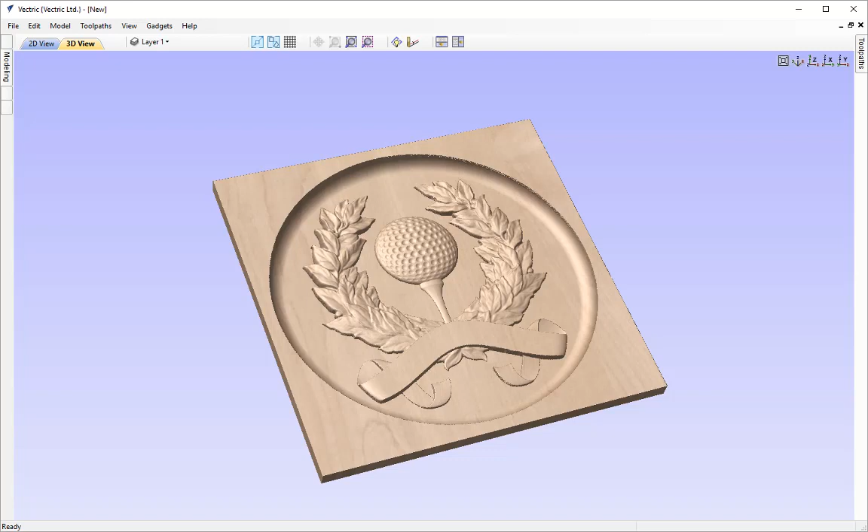I'm just going to go ahead and file close, and then start a brand new file. Let's click create a new file, and it's going to be a single-sided job. We'll start with a width of 8 inches and a height of 8 inches, specify a thickness of half an inch, set the Z0 position to be off the material surface, and have the XY datum position in the center. We'll make sure the modeling resolution is set to high, and then once we've done that, we can simply press OK.

Now when it comes to assembling clip art, we can literally start loading pieces from the clip art tab directly into the software and start arranging them into something that we might like. Or if we have a pre-planned design or even a sketch that we've sketched onto a piece of paper, and that's what I've done, we can import that into the software.

We can do this by coming up to this icon here, which allows us to import a bitmap for tracing. So I'm just going to click this, and you'll find that in your tutorials folder under the Golf Award files folder, then we have the Golf Award sketch. Now this is something I just drew on the nearest piece of paper I could find and scanned into the software. So I'm just going to select that and click open, and that'll place the sketch directly in the center of the software.

Now it came in a little small, so what I may want to do while it is still selected is come to the transform object size and set the selected object size to something a bit larger. So I'm just going to change the width to 6 inches, click apply, then close, and that's going to be the sketch we're going to work with when creating this assembly.

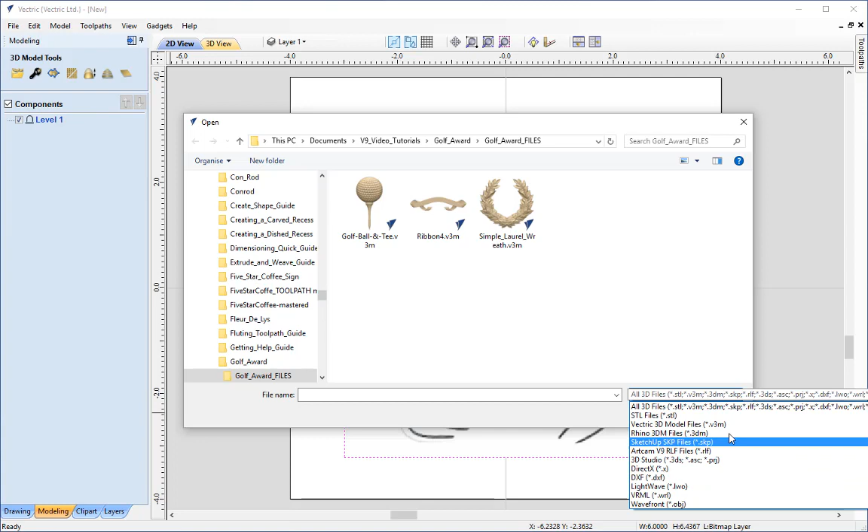Now what we're going to do is first select the simple laurel wreath, and we're going to click that and then click open, and that's going to import that model directly in the center of our work area, like so.

Another way to import clip art into the software is using the clip art tab itself. So if you just click on this tab here, once we've got the clip art installed, you'll see that we now have a folder called clip art, and within that we have all the subfolders which will be listed automatically by the software with all the different groups and categories of different pieces of clip art. Now this is not the only way, we can also add our own folders, so we could go to add and browse the Windows file system to add our own folders of clip art, and that will also bring in the subdirectories if there are any.

And also we can browse our local files. This is just on a temporary basis, so we won't be adding any folders in this section for later use, just simply using it for one time only. So you may want to navigate into our file system and just select one of these pieces of clip art to load into the system.

So I may want to double click that there, and that's going to put the golf tee into the center of our work area, like so.

Or we could simply navigate our library browser. So I may just want to go to the ribbons and banners section, like so, and choose one of these banners that best represents our shape. So I may choose ribbon 4, and we can simply drag that into the work area and let go wherever we want to place that, like so.

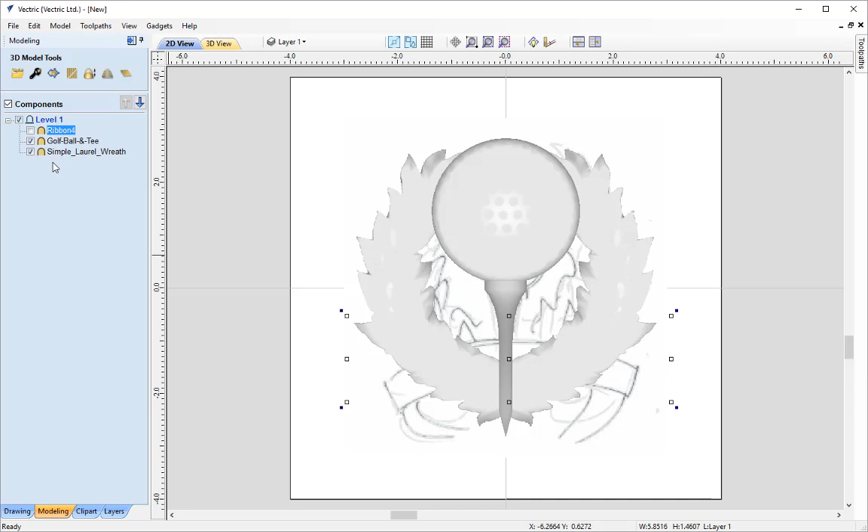So now that we've got all of our clip art into our work area, now might be a good time to start organizing the sizes and positions of our clip art. So what I'm going to do is go to the modeling tab, like so, and switch off the visibility of the ribbon and the golf ball and tee components, so I can edit and alter the position and size of our wreath.

So with the wreath selected, like so, I'm going to go into the drawing tab and resize the object. I'm just going to downsize this a little bit, to 5.5. So I'm going to type 5.5 in there. With the link XY enabled, it's going to automatically scale the height for me, and I'm just going to click apply like so, and close that.

And then I'm just going to go back to the modeling tab, and then I'm going to go ahead and turn the visibility back on of the golf tee like so.

Now it's obvious that this one needs resizing, so I'm just going to make that the selected component, go back into the drawing tab and resize this one again, to let's say 5 inches, apply. I think I need to go a little bit smaller, so I'm just going to type 4 and see what that looks like. Yes, I think that's around about the size that I'm after.

Now I'm just going to put the view into the vertical view so I can see the 3D and the 2D view at the same time. This will help me get a better look at what it looks like in the 3D view as well.

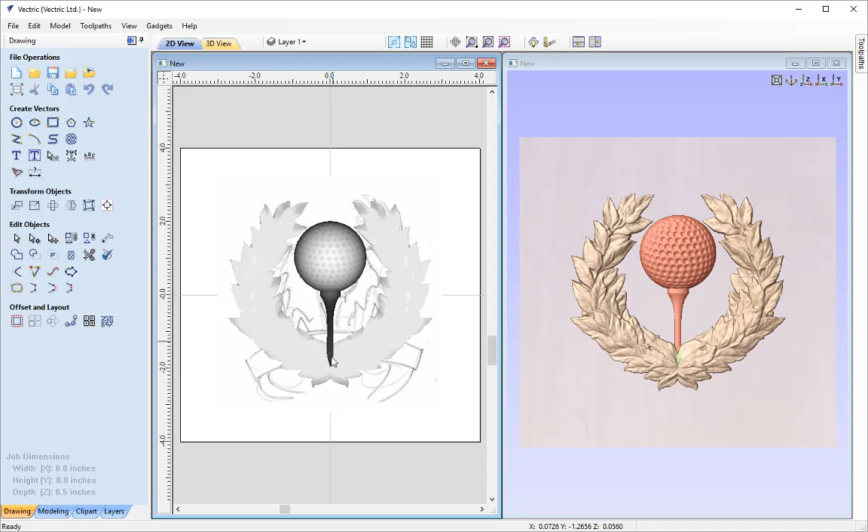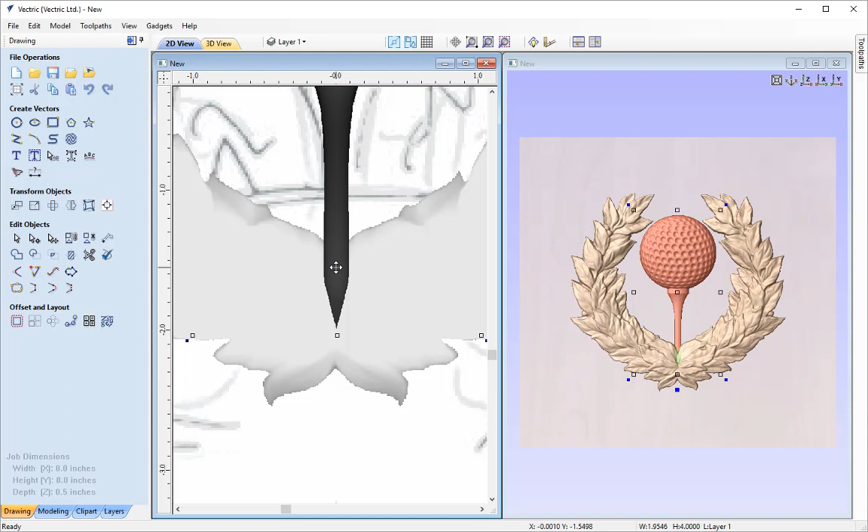So what I'm going to do with the golf ball and tee is I'm actually going to align this to the very bottom of the wreath. Now there is an easy way to do this. Just select the golf ball and tee so it's in transform mode, and you can see that by all the nodes appearing in the 3D view. And then with the mouse cursor with the 4 arrows, I'm going to hold the mouse button down, hold Alt on the keyboard, and that will allow me to drag this down vertically. And what I want to do is just get the point so it matches the very point of that bottom of the wreath there, like so.

And then when I'm done with that, I can just press F on the keyboard to zoom to fit, like so. And then what I'm going to do is go ahead in the modeling tab and turn back on the ribbon, like so.

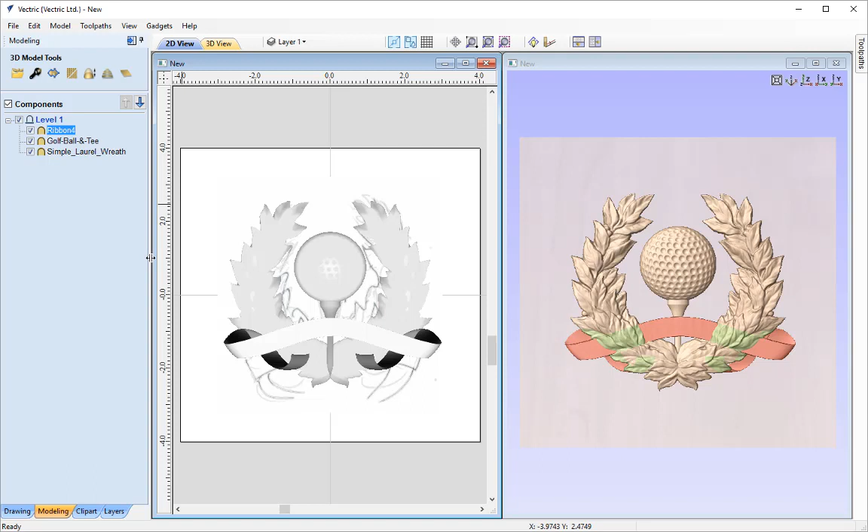And with that, I'm just going to again select it like so. Now, because of the way that we imported the ribbon into the software, it's not actually in the dead center of the software. So I'm going to need to center that after I've resized this.

So I'm just going to resize this the simple way by using the transform shortcut. So I just want to change the width of this to 5. So I'm just going to simply type in 5, 0 to auto scale the height and press enter, and that's going to change that for me.

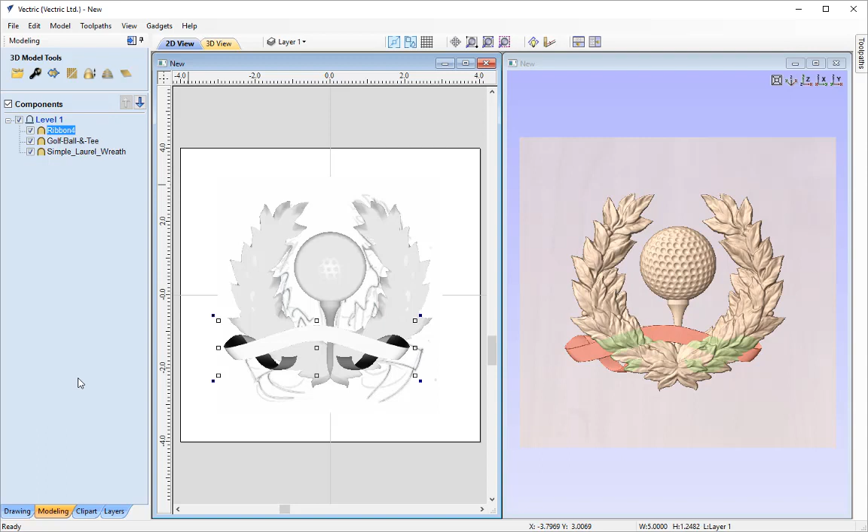And then what I'm going to do is center that in the center of our material like so. And then I'm just going to close that, put it back into transform mode, and from the center I'm just going to hold Alt again, just drag that down in line vertically to around about here, like so.

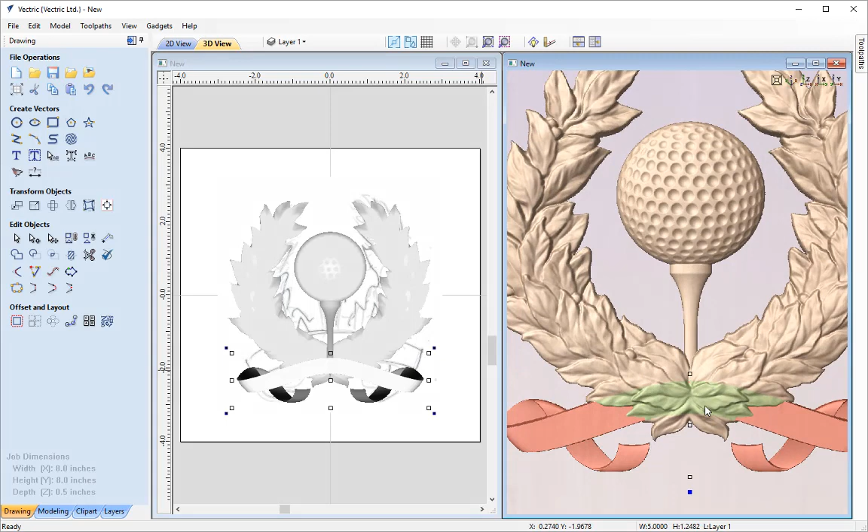If we zoom in a little on the 3D view, you'll see there's a very small gap between the ribbon and the wreath. That may cause problems when machining, and we may not be able to clear that gap depending on the size of the tool we're going to use.

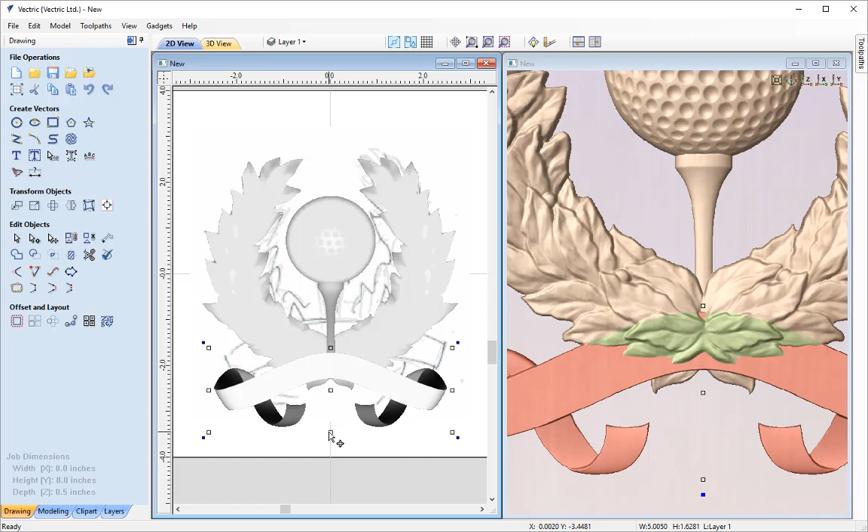So what I'm going to do is resize the ribbon itself. I'll grab this center bottom node and drag it downwards, roughly to around here. Let me zoom in a little bit and drag a bit more, like so, then hold Alt on the keyboard and try to center that in the middle of our wreath.

So what I'm going to do here is press this icon to get the full view back in the 3D view, like so, and that looks about right. That's perfect.

That completes the positioning of our 3D components, but now we need to think about the order of appearance of our 3D components, as at the moment they are intersecting one another. For this we can use solely the 3D view.

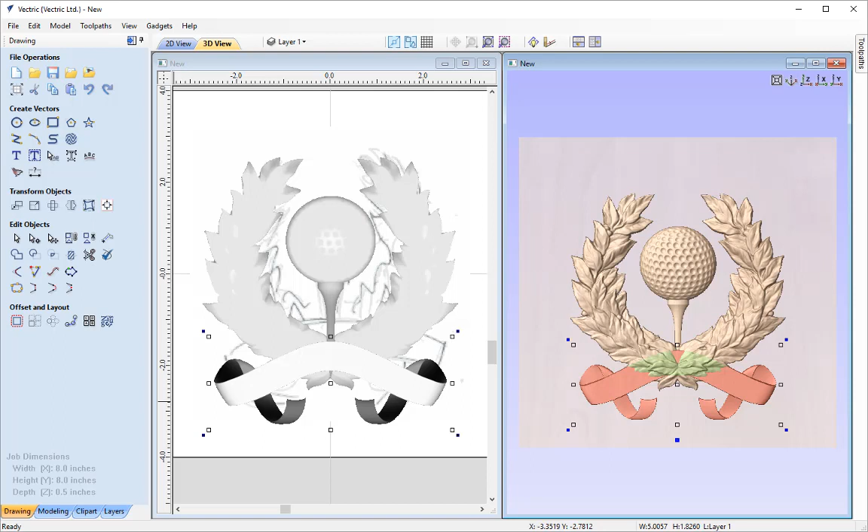I'm just going to enlarge the 3D view and take a closer look at the components themselves. Now the order I wish the components to appear is: I want the golf ball and tee to appear at the back of the composite model, then I want the wreath to be in the middle ground, and then I want the ribbon to appear in the foreground.

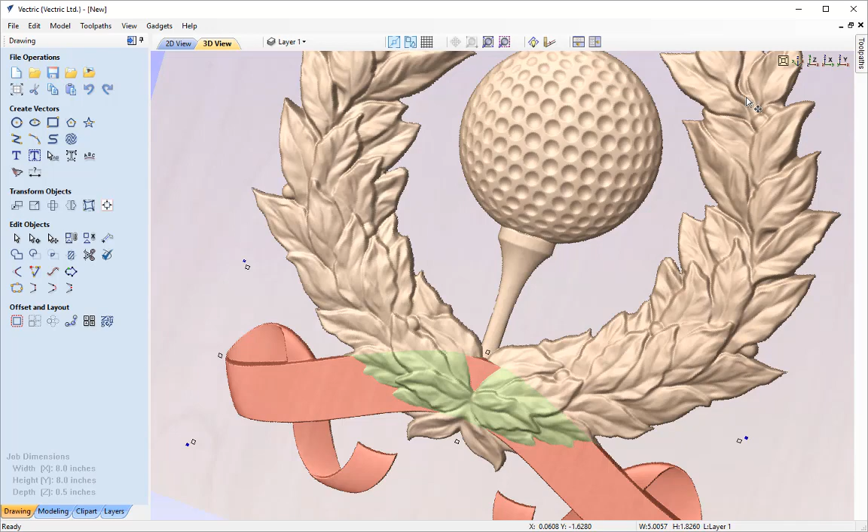Now I just did move that, so I'll press Ctrl Z to undo that movement, just in case you happen to do anything like that as well. So I'm just going to click that back in the Z axis.

Now I'm going to start with the wreath, so I'll double click on the wreath like so, and work solely in the 3D view here. I'll click again to get the transform nodes available, and you'll see this bottom dark node here.

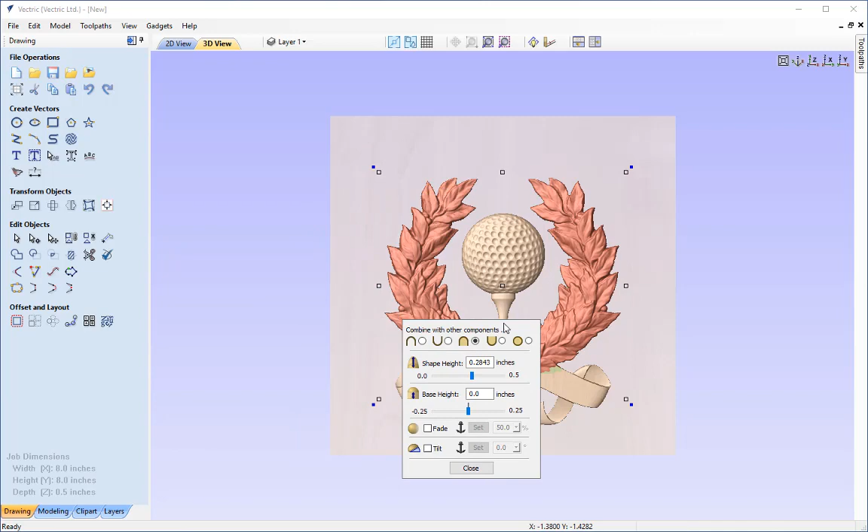If we click that, we get a short version of the component properties form, and we can actually move this anywhere we like within the window. We don't actually need to keep it inside the software either, so if we wanted to take it outside, we can.

Now we can see at the moment that the wreath is at a height of 0.28 of an inch. So I don't really want to add any more height to the wreath, and I don't really want to reduce the height of the wreath, as you can see we've got some really good detail here on the wreath.

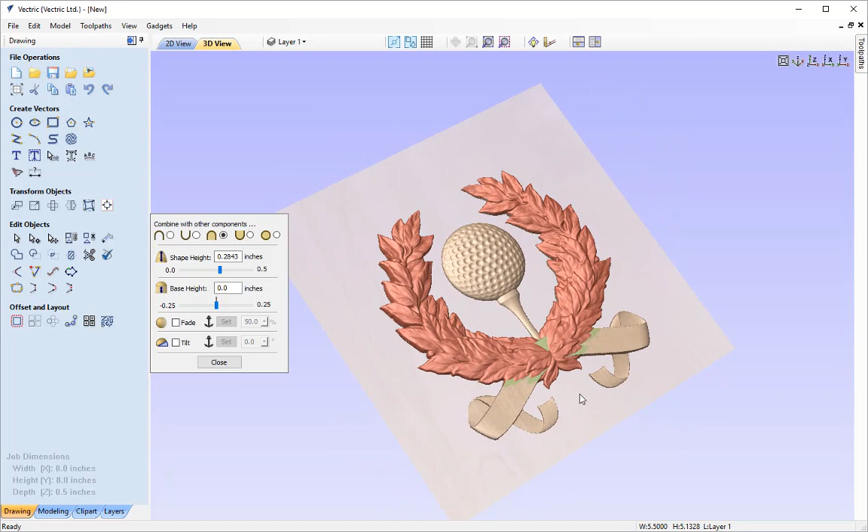But what we do need to consider is the fact that this ribbon does need to stand proud on top of the wreath, and I don't really want to add too much height to the ribbon either.

So the way we can actually conquer this problem is by applying a fade to the component. What this does is we set an anchor point from one position, which acts like a hinge, and then we put another anchor point in another position, and in between those two points we specify, we gradually fade down the height of that component to a percentage we're going to specify.

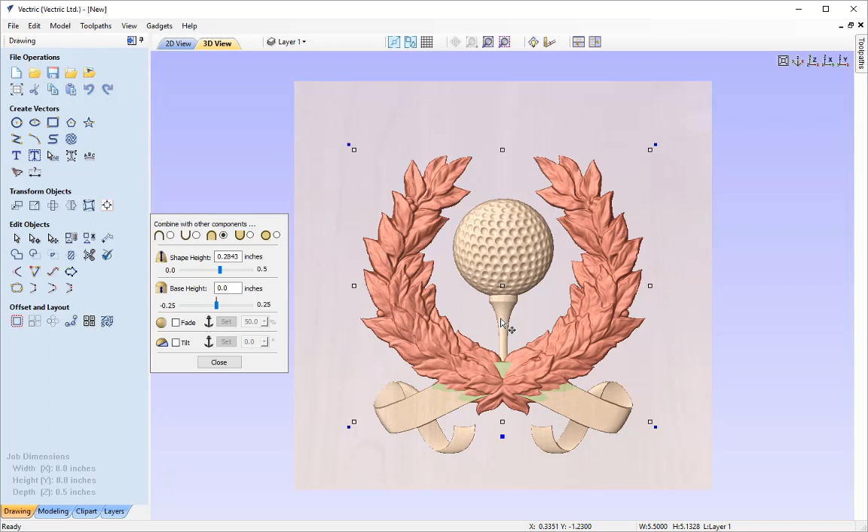So let's check the option to fade, and then check the button to set the anchor points, like so. We're going to fade from the top, so this is where it's going to hinge from, and we're going to click down at the bottom where we specify where it's going to fade down at its most.

As you can see here, it's faded down quite a lot, so we've already achieved what we want, but we can actually try and get away with fading it down less. So let's just scroll down, and this will automatically readjust the 3D view for us.

So I don't want to lose too much detail, so I just want to go down to maybe, let's try 40%, like so. So maybe something around this area here, like so.

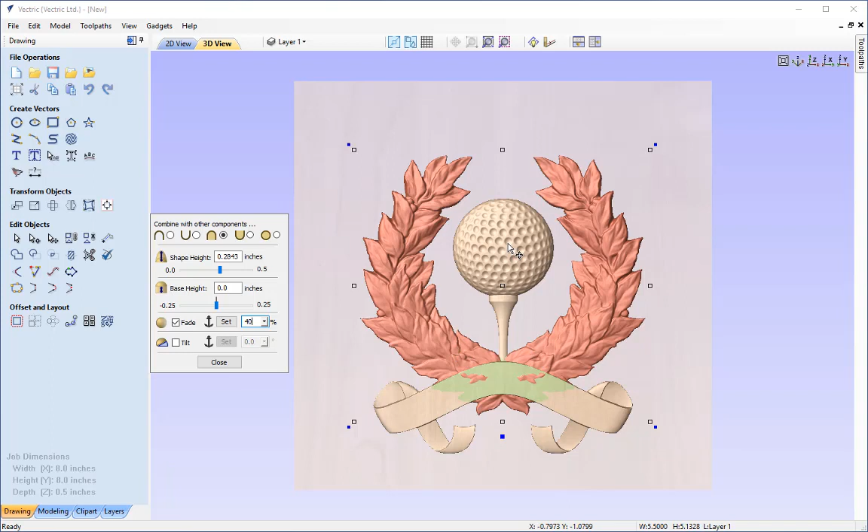And then what we can do is we can then double click the golf ball and tee and then adjust the position of that. So if we just select that, like so, and just zoom in a little here. Now you can see at the moment this is standing sort of in the same region as the wreath. So what we want to do is we also want to reduce the height down the bottom here to make it appear in the background.

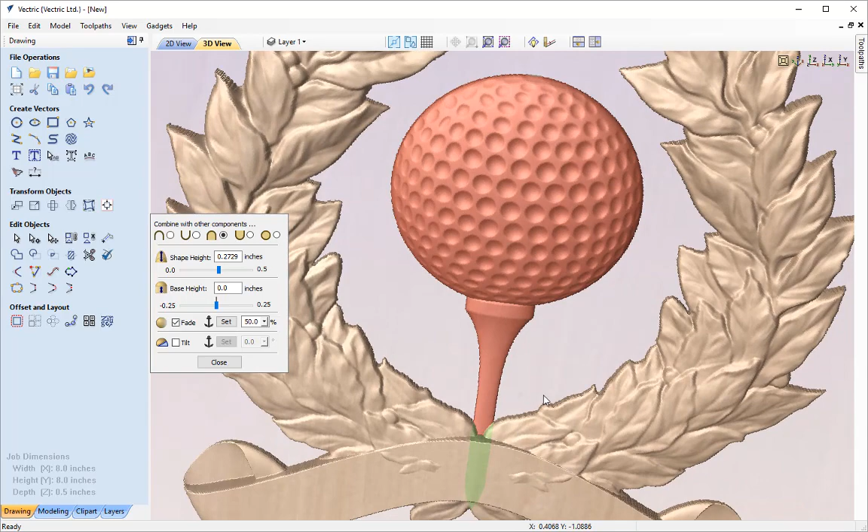So we can apply the same method again that we just did to the wreath. So if I just click that back in the Z-axis there, just zoom in a tiny bit, I'm again going to use the fade option. So I'm just going to click the set button again. So I'm just going to do the same from the top through the bottom, like so, and you'll see that straight away that has now put that behind the wreath for us. So that's automatically achieved exactly what we're after.

And now we can move on to our last component, which is the ribbon. So I'm just going to double click that one there, like so. Now I could, if I wanted to, adjust the shape height to just push that above the wreath that's coming through here, or I can simply add a base height to the component itself.

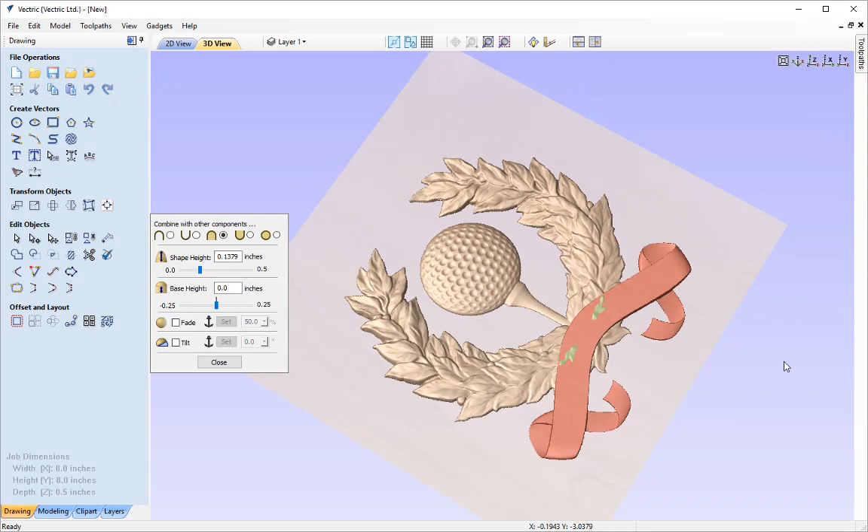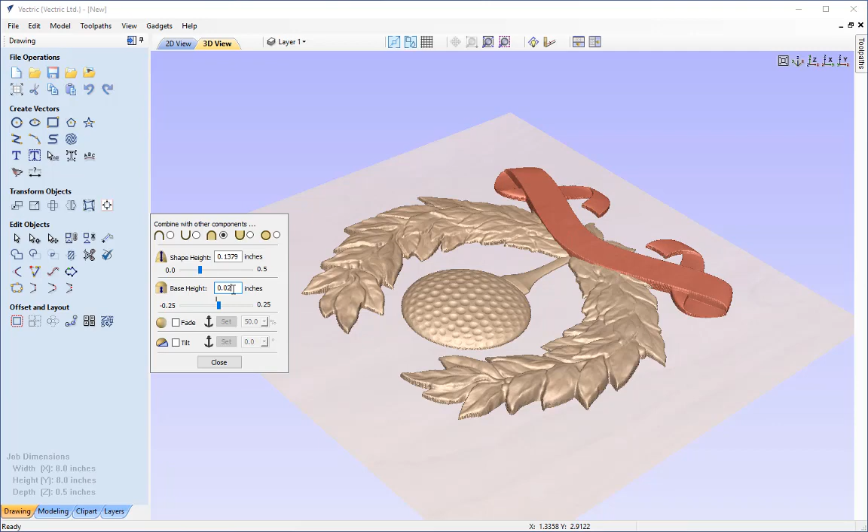So if I just go ahead and specify a value here, so I'm just going to go for 0.01, just press spacebar, and you'll see that has pushed it up a little bit, but I can just see 2 speckles of the wreath still coming through there. So I may just want to clear that just a little bit more, so I might just go for 0.02, like so. And let's push that up enough now where we can't see any of the wreath coming through either.

So that now gives us the visual appearance that the wreath is sitting behind the ribbon and the golf ball tee sitting behind the wreath.

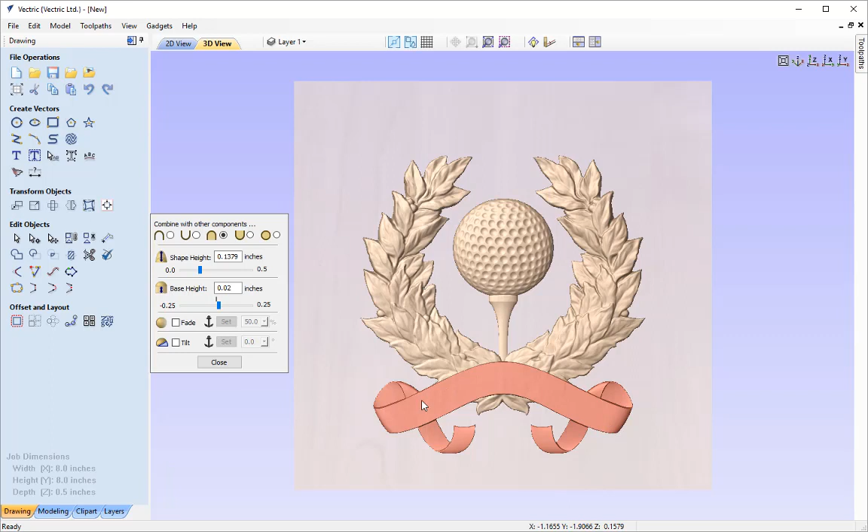So the next thing that I'm going to think about is actually applying some text ready to machine later on along the ribbon. So what I'm going to do is I'm just going to close the components form there, like so. And then what I'm going to do is I'm going to go to the Draw Text tool. And as I'm going to be working with text, I'm going to go back into the 2D view. So I'm just going to go into here, I'm going to click F on the keyboard to zoom to fit.

And what I'm going to do is I'm just going to type out some text. So in capitals, I'm just going to type hole in one, like so. And I'm going to use a true type font, and you can use any from your system default fonts, but I'm going to use one called Georgia, like so. And you can just type that freely in and that will come up with the nearest font that you've got in your system. So I'm just going to select that, like so.

And I'm going to give this a text height of 0.4 of an inch, and I'm just going to click apply and close, like so. Now my aim here is actually to have this text follow this curve of the banner.

So what we're going to do for this is we're actually going to go ahead and create ourselves that curve manually. So I'm just going to deselect the text there, and I'm going to go into the Draw Polyline tool, and what I'm going to do is I'm just going to zoom in a little towards the bottom of the ribbon. And what I'm going to do is I'm going to click just at the point here, and I'm going to hit the center of that ribbon here, and you can see that I've got the suggested center of the material there with the vertical line that's heading up.

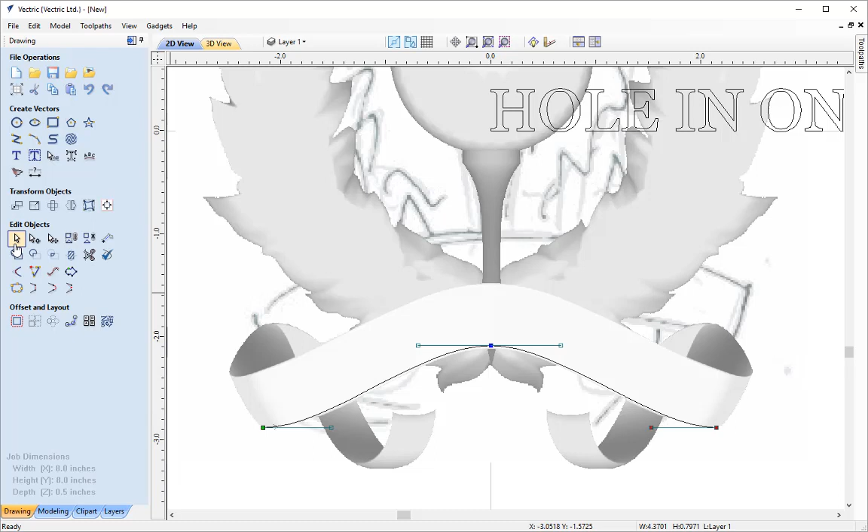Feel free to make further edits if needed. I may want to move that node out a bit so it matches the point on the corner, dragging it horizontally using that vertical line as a guide. That's gone a little too much, so I'll bring it back like so. Once done, we can use the normal selection arrow.

We can zoom to fit, and what we're going to do is first select the text, then hold shift down and select the vector we just created, and then go to this option under the create vectors section called text on a curve, where we can wrap text along a curve.

Click that, and we'll be presented with various options for applying text along a curve. First, I want to maintain the text size as it is, and I don't want to mess with the text spacing. For text position, I want it above the curve, aligned in the center of the line, which is good. I'll add a slight offset distance of 0.1, a tenth of an inch, and align it to the curve.

I'll click apply like so. Now if you get anything like this happening, it's because this option, text on the other side, has been checked. So just uncheck that, and you'll see it's now put in place correctly. Simply click apply and close.

Now I'm just going to click in the white space to deselect both of those, then select the curve we created and hit delete on the keyboard, as we no longer need that vector.

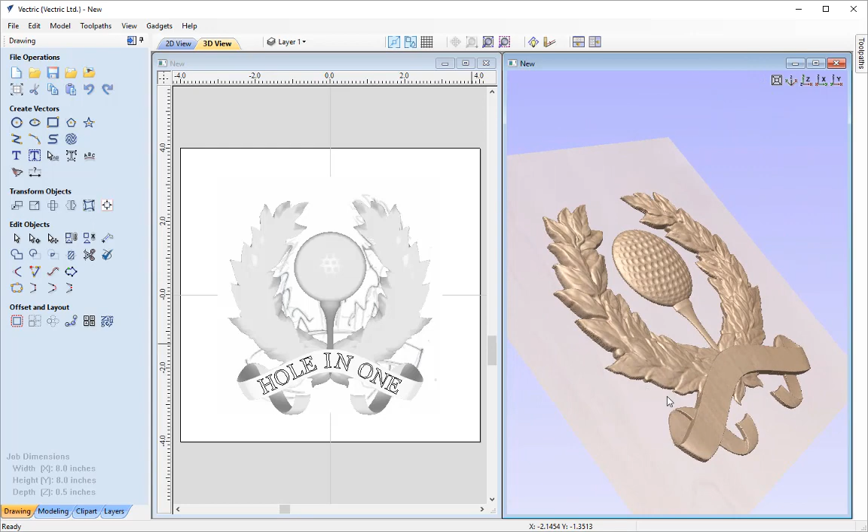If we come across anything like this and want to make a quick edit to soften the edges of a component, we can simply double click to select the component we want to smooth, come to the modeling tab, and go to this option, which is to apply a smoothing filter to the component.

We just select that, and you'll see it automatically applies 50% smoothing. You'll notice that's already made the corners a lot smoother than they were. Just to compare what they were, in case you missed that, let's bring it all the way down to minimum, and you'll see the difference between those two now.

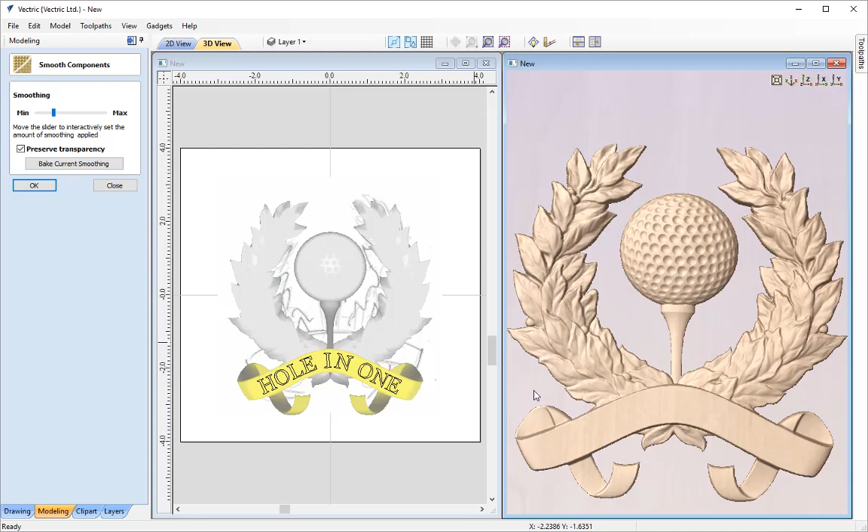Now what I'm looking for is around about 25%, 20% smoothing. So if I just click here, you see that that's added just enough smoothing now where I feel that complements the wreath and the golf ball. It actually feels like it belongs within that composite model. So once we're happy with the smoothing we've applied, all we do is simply click OK, and that will exit that smoothing form for us.

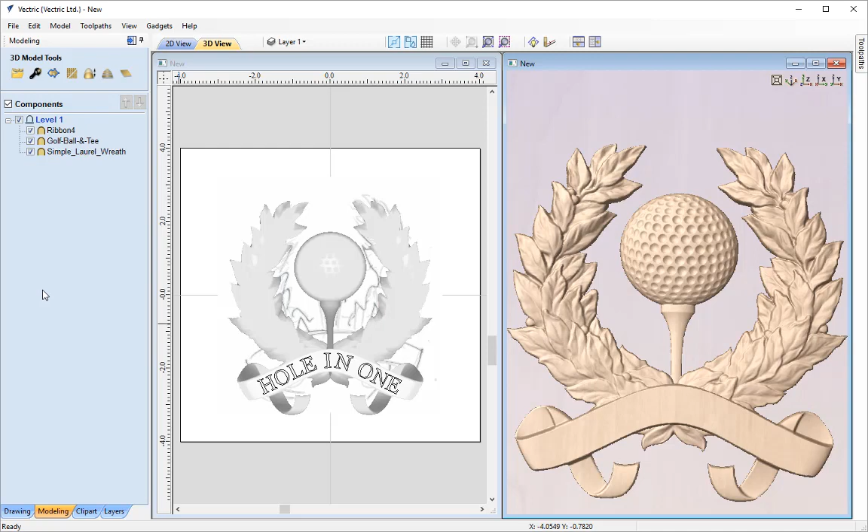Now though, we can start to think about placing our award into a dish. When working with parts that are dished or recessed below the modelling plane, it's very important that we have a component that represents the plane, for two reasons. One, it helps us to see visually the part, and two, it helps prevent some possible issues we might encounter when it comes to machining, which we will look at when we set up the toolpaths.

So to add in a modelling plane, all we do is click this icon here, and you'll notice that has created us a component named Zero Plane. Also, if we check the Layers tab, you'll notice it has also created its own layer called Zero Plane, with visibility checked off. The reason is that if we check the visibility on, you'll notice it's gone grey, matching the outside of our working area. If this component was placed on any other layer, it would obscure all of the components in the 2D view. That's why we automatically put it on its own layer at the very top of the layer list, and check off the visibility.

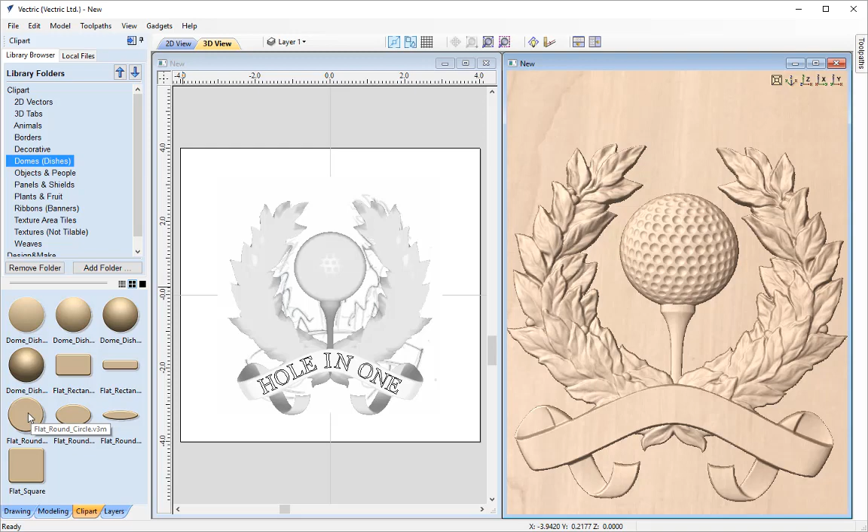Now we've done that, we can go ahead and add our dish. I'm going to go over to the Clip Art tab, to this section under the library folders, Domes and Dishes. I'm going to import the flat round circle, so I'll double click, and that places that directly in the center of our work area. I'm just going to press the Z icon to put the 3D view back in the Z axis.

As you can see at the moment, the dish has come in positive. So what we need to do is change the combine mode to negative. If we click the large blue node at the bottom, that brings up the shortened component properties form for us, and all we need to do is change the combine mode of this component to negative. So simply select the negative icon here and then close, and you'll notice that has turned that shape into a dish for us.

So all we need to do now is resize that so it can house our award that we've created. I'm going to go to the Drawing tab, and set the selected object size, and as they're both equal, you can change the width or the height as long as link XY is enabled. I'll just change that to 7.5 inches, click apply, and close.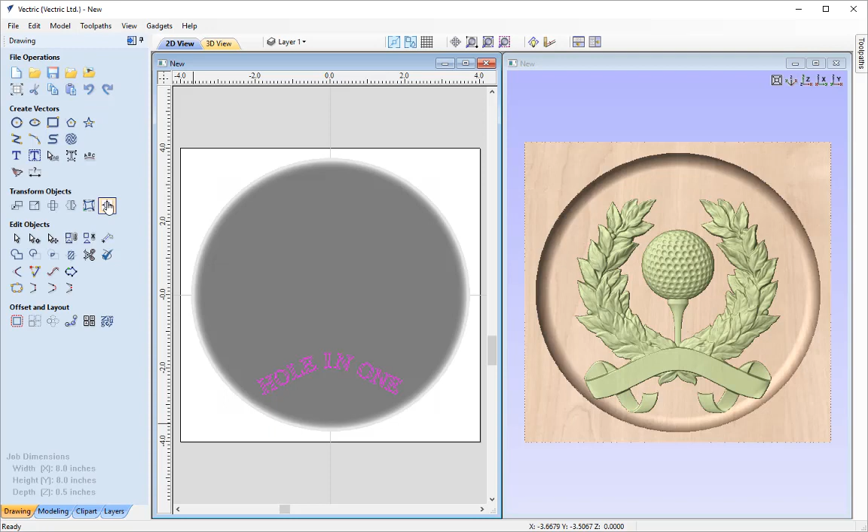Then what I'm going to do is center the other objects in the dish. I'll go to the Modeling tab, select the simple wreath to the ribbon, and make sure the text is selected too, holding shift down so it moves in line with our banner. Go to the Drawing tab, go to Align Selected Objects, and align to the center of the material, as we already know the dish is centrally aligned. Press that button, and that's now moved that into the center of our dish.

Now when working with a recess or a dish and placing objects within that dish, it's always good to think about the heights of the models to make sure they're not appearing above the dish or the zero plane, because if they were, they would create flat spots and we just wouldn't machine them.

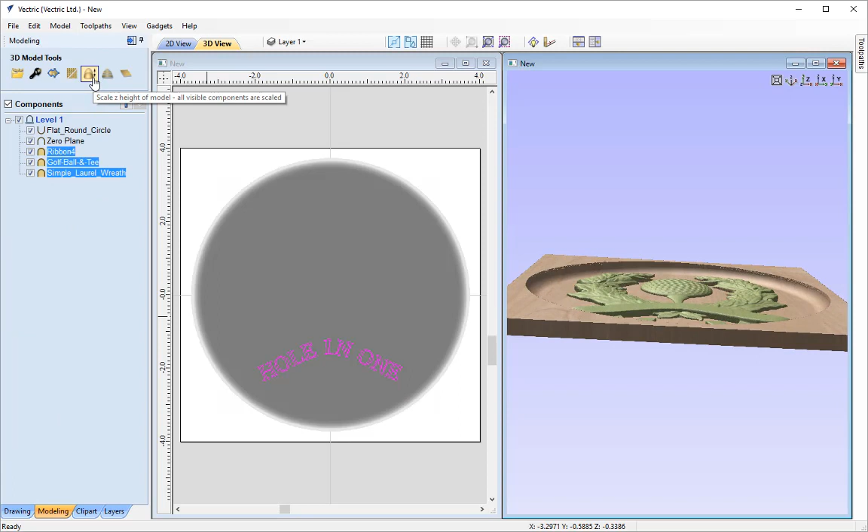So we need to make sure that they're not actually appearing above that. How we do that is we can either look down either axis, or we can come to the Modeling tab and look at the Scale Height of the model, and here it will tell us the exact height of all the components.

Now if anything is appearing above the zero plane, which is at the top of our model, it will say a height above the maximum Z. At the moment you can see that the height is 0 for the maximum Z, which means there's nothing that appears above that zero plane, which is perfect.

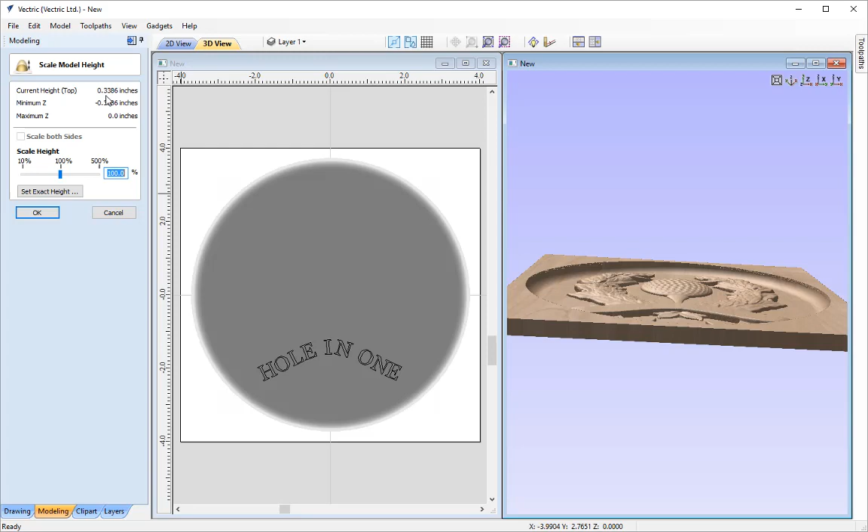That's exactly what we want. But when I look at the height of the overall model, I see that it's only 0.3 of an inch. So that does mean that we do have some material to play with, so if I wanted to, I could increase the height of the components within the dish to make them stand out more and more prominent.

How I could do this is simply, if I come out of this form here, I'm going to select the simple Laurel Wreath, and again shift and select the ribbon so it selects all three components. Then I'm going to right click them all and select to group them.

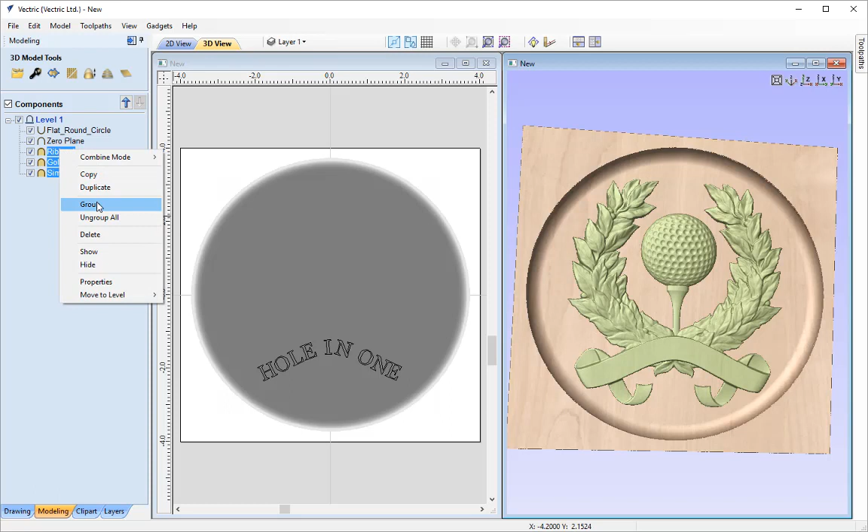As if I group all the components together I can now edit all of the components as one. So if I now go to the components, component properties, you'll see that we now have a combined shape height of 0.2393. Any edits that I make here is going to affect all the individual components equally.

So we know that the shape height overall is 0.3 of an inch, and that is basically going to be made up of that dish recess shape. So I know that I can at least go up to 0.33 of an inch without it going above the 0 plane. So let's move this up. I'm just going to go for 0.3 and hit the space bar there, and that will then re-render the 3D view for us.

I'm just going to take a look in the 3D view. You can see that's moved that up nicely for us.

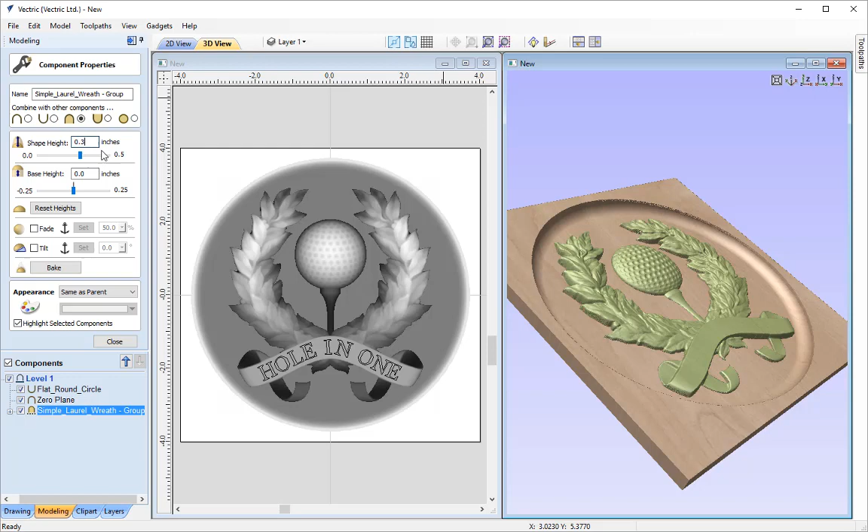We could though, since we know that the material we're using is 1/2 an inch thick, move up the height of not only these components we're editing now, but also make the dish a little deeper to accommodate the larger laurel wreath award configuration we've created. So I'm going to change this to 0.35, and that's now standing very proud from the base of that dish.

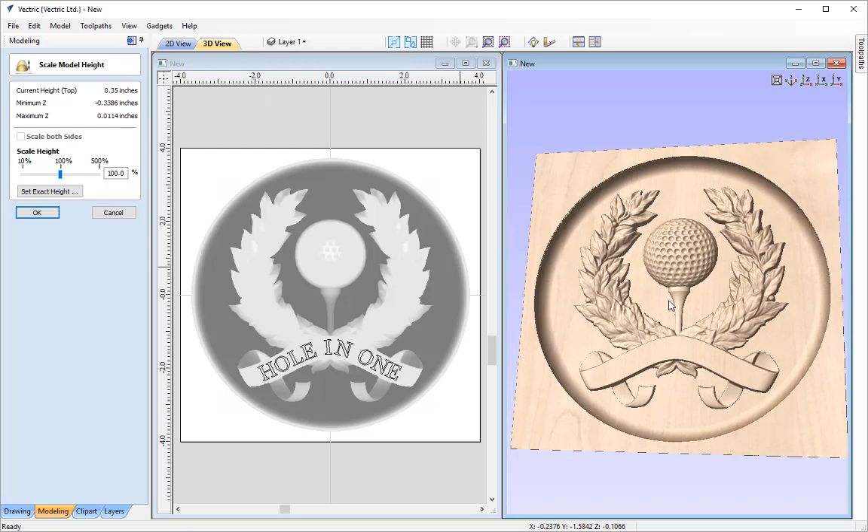And if I come out of the component properties and then go to the scale Z height of model, you'll notice that now the maximum Z has gone above 0. That does mean that the model inside the dish is actually above the 0 plane. You can't really tell in the 3D view as it's very minor, but it's good to know, because anything that appears above this 0 plane will end up with a flat spot as it won't be machined. So it's always good to verify that information.

What I'm going to do now is change the height of the flat round circle to accommodate the golf award itself. So I'm going to select it and go into the component properties, and just change the shape height to 0.4 of an inch, hit the space bar so that re-renders, and then close.

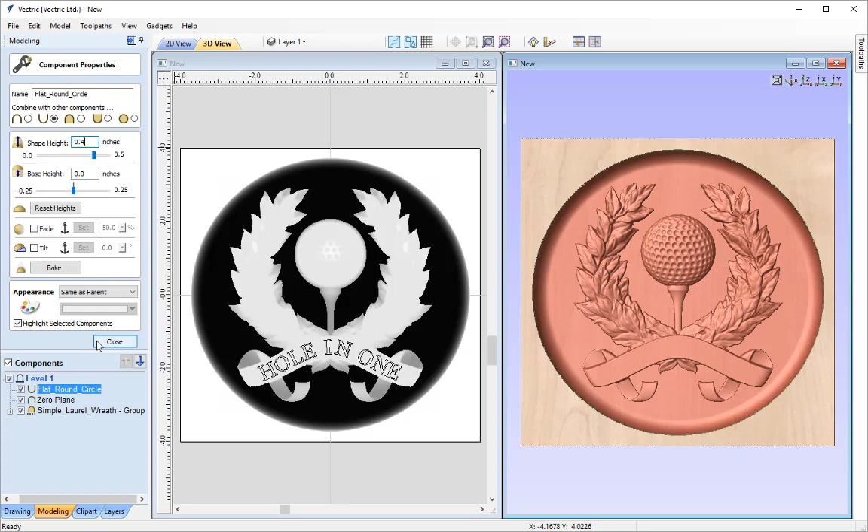And now when I go into the scale Z height of model, you'll notice that there's nothing appearing above the maximum Z, as the maximum Z value is 0. So that now completes our model.